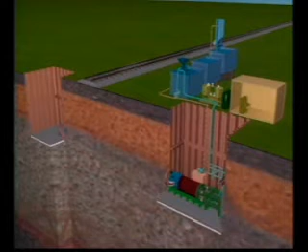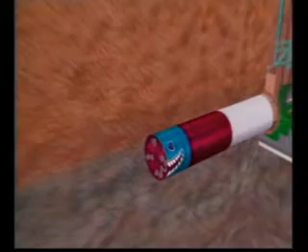Microtunneling is a technique for installing underground pipe without trenching. Powerful hydraulic jacks are used to push specially designed pipes through the ground behind a remote-controlled tunneling shield called a microtunnel machine. Simultaneously, excavation takes place at the front of the machine, and the excavated materials are pumped to the surface by a circulating slurry system.

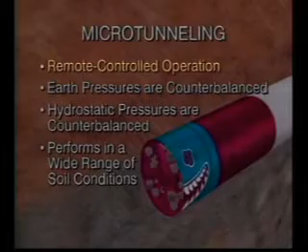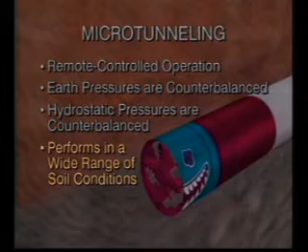Microtunneling is distinguished from other tunneling techniques by four very important factors. It is a remote-controlled operation, reducing manpower requirements and increasing job site safety. Earth pressures at the tunnel face are counterbalanced by the machine, virtually eliminating ground movements. When groundwater is present, hydrostatic pressures are counterbalanced by the tunneling machine without dewatering. And microtunnel machines can be designed to perform in the widest possible range of soil conditions with the same cutter head.

Microtunneling systems permit tunneling through almost any ground, while providing maximum security against ground movements without the employment of costly ground stabilization or dewatering techniques. The end result is a flexible, hardy, watertight finished pipeline with an absolute minimum of surface disruption.

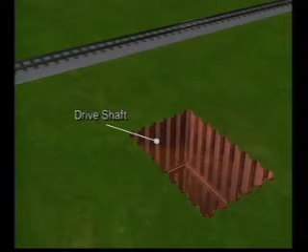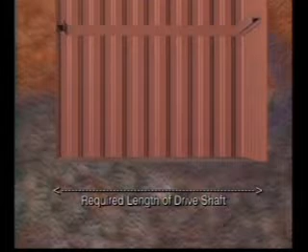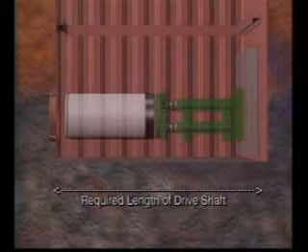The first stage of construction calls for shafts to be sunk at each end of the intended drive, usually at manhole positions: on one end, a drive shaft, and on the other, a reception shaft. The drive shaft marks the beginning of the drive. It may be circular, oval, square, or rectangular, but must be long enough to accommodate the tunneling equipment, specifically the combined length of the thrust wall, hydraulic jacking system, microtunnel machine or pipe, whichever is longer, and entrance ring. The reception shaft, on the other hand, need only be large enough to accommodate removal of the microtunnel machine.

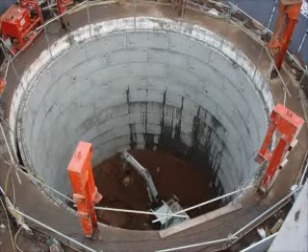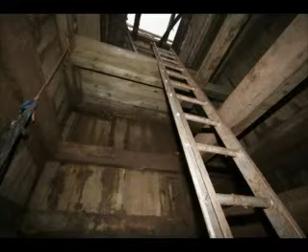There are several different methods of shaft construction, including sheet piling, liner plate, soldier piles and sheeting, corrugated metal pipe, segmental lining, precast or cast in situ caissons, and shallow trench-sheeted or timber-supported excavation.

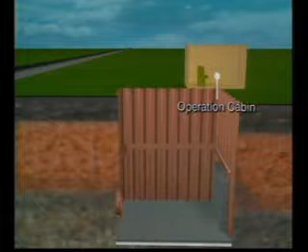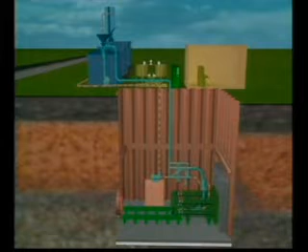The microtunneling equipment includes the operation cabin and remote control board, the jacking and lubrication systems, the slurry system, as well as ancillary equipment such as cranes, generators, and trucks. Then the microtunnel machine, the real workhorse of the microtunneling process, is lowered into the drive shaft and onto the guide rails.

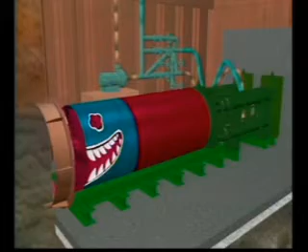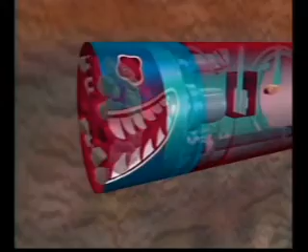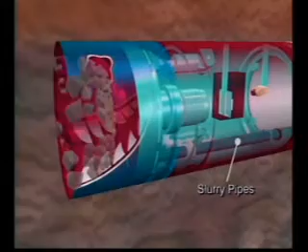The microtunnel machine is thrust forward by the hydraulic jacks, first passing through the entrance ring, then tunneling through the ground on its journey to the reception shaft. Powered by electric motors, the rotating cutter head cuts through the earth. Excavated material is crushed in the head of the machine when necessary and passes into a slurry chamber, where it is mixed with slurry and transported to the surface via slurry pipes.

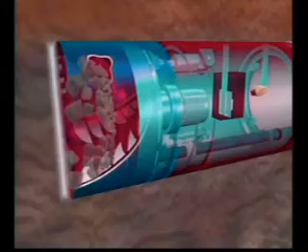During excavation, a sophisticated earth pressure counterbalancing system is employed. By maintaining a consistent counterbalance pressure on the tunnel face, always between the active and passive earth pressures, ground movements are virtually eliminated. After the machine has fully penetrated the ground, excavation is halted.

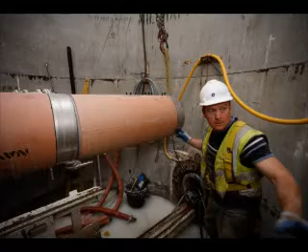Cables and hoses are disconnected, and the first section of pipe is lowered onto the rails. The pipe is pushed up to the back of the microtunnel machine, where they are joined by an adapter ring, and all systems are reconnected. Then, together, they are jacked forward as the excavation at the face of the machine continues.

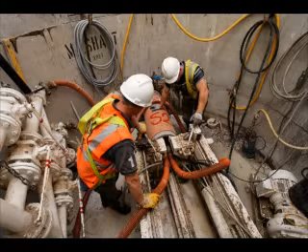On the completion of the jacking of one pipe, excavation is stopped. The jacks are retracted. Another pipe section is inserted behind it, then pushed forward, and the process is repeated until all the pipes are installed, forming the permanent tunnel lining.

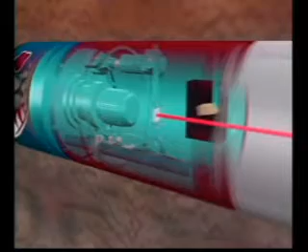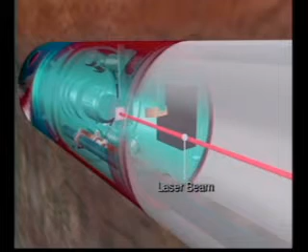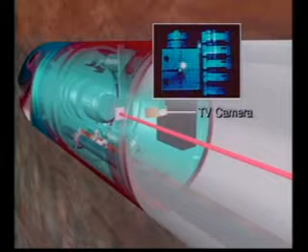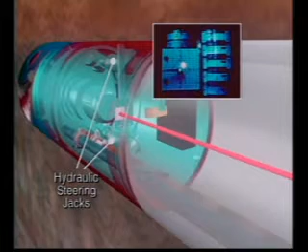The alignment of the machine and pipe is controlled using a laser-guided steering system. A laser beam originating from a laser at the rear of the drive shaft and set to the required line and grade is projected onto a target mounted inside the microtunnel machine. An image of the target is captured by a TV camera and relayed to a monitor in the remote control board at the surface. The operator can activate hydraulic steering jacks inside the microtunnel machine as necessary to articulate the front section of the cutter head and alter the attitude of the machine. Accuracies of plus or minus 1 inch in line and grade are typically achieved over an entire drive.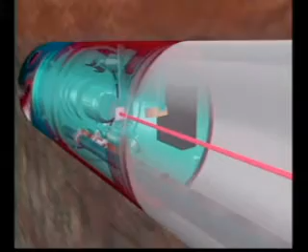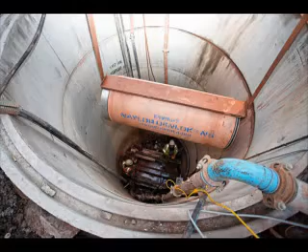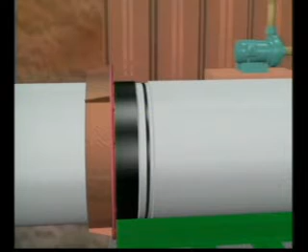Pipe used in microtunneling, called jacking pipe, is basically a thicker-walled version of direct burial pipe. Jacking pipe consists of a female end fitted with a collar and a thin ring of fiberboard to act as a packer, and a male spigoted end fitted with a rubber seal. When joined together, a durable, watertight seal is formed. The outside surface of the pipeline is smooth, minimizing friction as it is jacked through the earth.

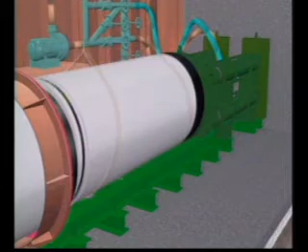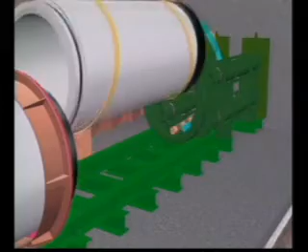The hydraulic jacking system provides the thrust required to move the microtunnel machine and pipe through the earth, and is located at the rear of the drive shaft. After a section of pipe is placed on the guide rails, the jacks are slowly extended, powered by an hydraulic power pack on the surface. The force of the main jacks and the speed at which they extend is carefully synchronized with the excavation rate of the microtunnel machine. Thrust ring and pipe ring adapter ensure that uniform thrust is transferred from the jacks to the pipe.

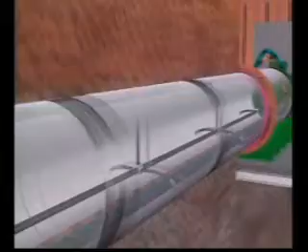As the length of the drive increases, so does the total friction produced between the pipe and the earth, thus demanding a greater jacking force. To reduce this friction, a clay-based or polymer lubricant mixed in a lubricant mixer on the surface is injected into the annulus between the pipe and the surrounding earth.

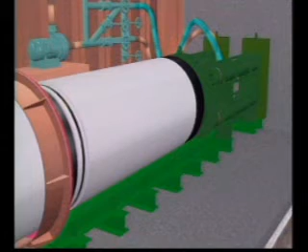Lubricant is always introduced immediately behind the microtunnel machine through a lubrication port in the machine. For larger machines and longer drives, lubrication ports are also provided at regular intervals through the wall of the jacking pipe to provide continuous lubrication around the pipe. This technique results in a considerable reduction in friction. Thus, the required jacking force is reduced, and longer jacking lengths are achievable.

After the drive, the microtunnel machine and equipment are removed, manholes are built, and the shafts are backfilled.